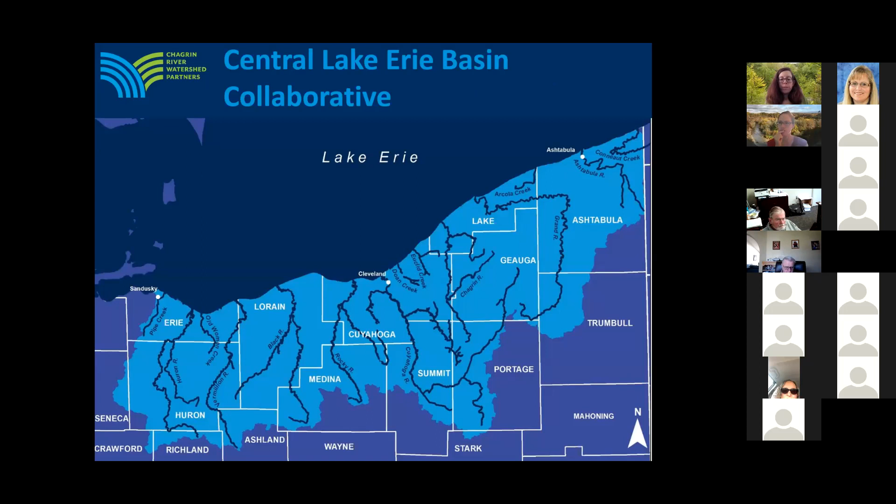CRWP really benefits from our trusted relationships with our member communities. Part of the reason we've been able to establish these trusted relationships include the following. The first point is that CRWP is structured with a community membership model. Each of the members in CRWP have a seat on our board of directors.

We've also been working with most of these communities for more than 20 years. For some communities we've been working with since our founding 25 years ago. We work closely with a variety of city, county, village and township departments, including mayors, councils, planning and zoning boards, the legal departments, the engineering staff. So we have a broad view of various perspectives in each of the communities that we work in.

Many of our communities consider us technical experts, and they involve us in development and conservation decisions. CRWP maintains a suite of model codes covering a variety of topics. If you're not familiar with the term model code, a model code is an example ordinance or zoning resolution that is a starting place for communities to use to enact their own regulations.

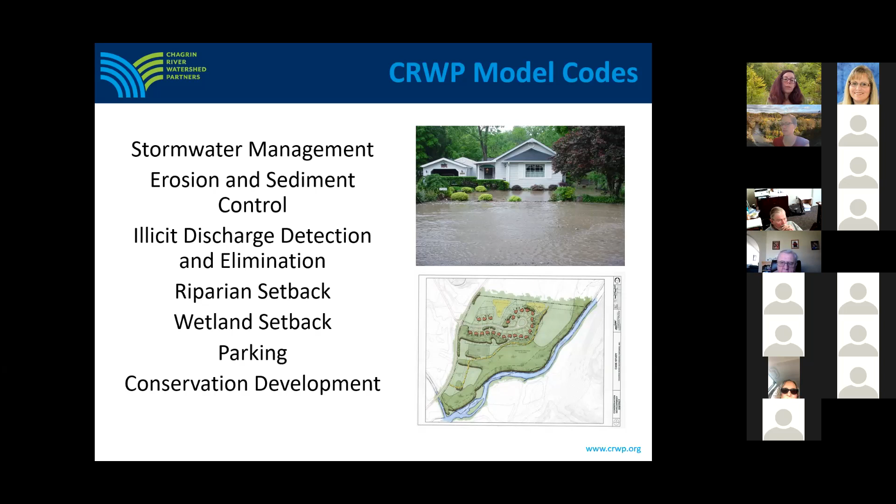I'll provide a little bit more detail about our conservation development code. If that's not a term that you're familiar with, it's a style of development that helps to preserve large portions of open space by using a different distribution of lots. So instead of having a little bit of open space on each lot, as would be the case in a traditional development, the lots in a conservation development are smaller, and then there is a larger area of pooled open space.

This style of development results in less infrastructure to maintain. It can be done through a planned unit development code or as a zoning overlay. And if you're interested in this, I suggest you check out our model code.

You may be wondering, why does CRWP have a parking code? What does that have to do with streams or stormwater management? Well, there's a direct relationship between the amount of parking that is required in your community and the amount of impervious surface in your community. So we developed a model parking code that includes language that communities can use to make sure that their existing regulations are allowing for pervious paving materials, shared parking, and land banking.

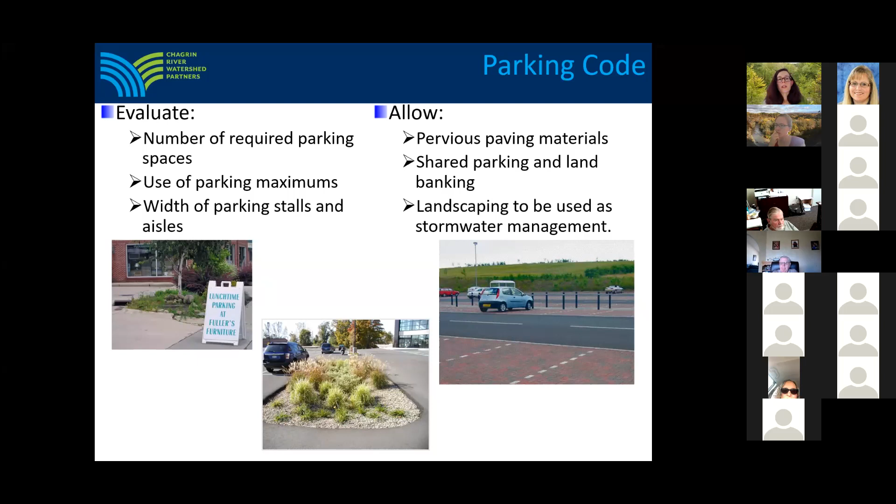We also suggest that communities look at the number of parking spaces that they are requiring to make sure that they are not requiring more parking spaces than are really needed, and to consider the use of parking maximums and consider reducing the width of parking stalls and aisles to reduce the amount of impervious cover in the community.

CRWP thinks that codes are great tools. You can use them to reduce the costs of private development to public infrastructure and to avoid problems upfront rather than fixing them later. Furthermore, if you're an MS4 community, you're required to have stormwater codes anyway, so you might as well make them do as much work as possible for your community.

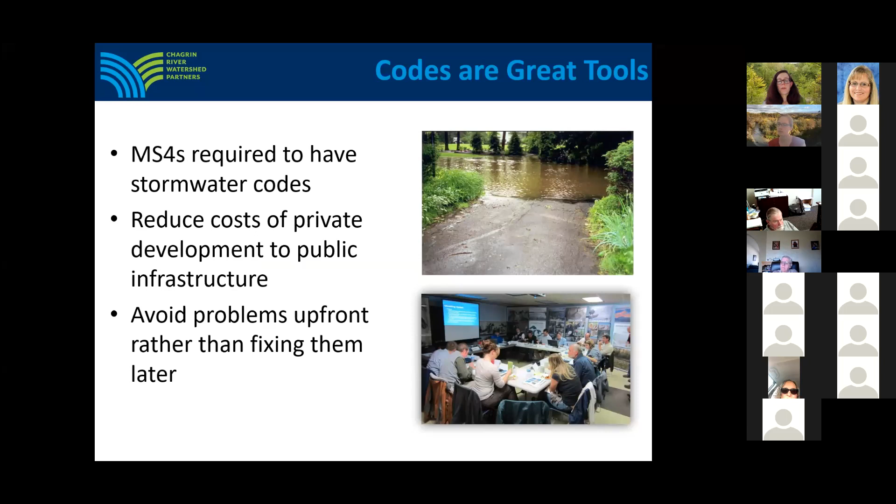Speaking of requiring to have stormwater codes, if you're an MS4 community, you should be aware that you need to update your comprehensive stormwater and erosion sediment control codes by April 1st of 2022. How would you know if you need to update your comprehensive stormwater and erosion sediment control code? Well, if you're using our model, you should update your codes. If you're not, here are some other things to consider.

In the latest construction general permit, the water quality volume changed. It increased from 0.75 to 0.9 inches, and there is now a new water quality volume calculation, which appears on your screen. If your old code has the old water quality volume and the old water quality volume calculation spelled out in it, you need to update your ordinance to be compliant with the new MS4 permit.

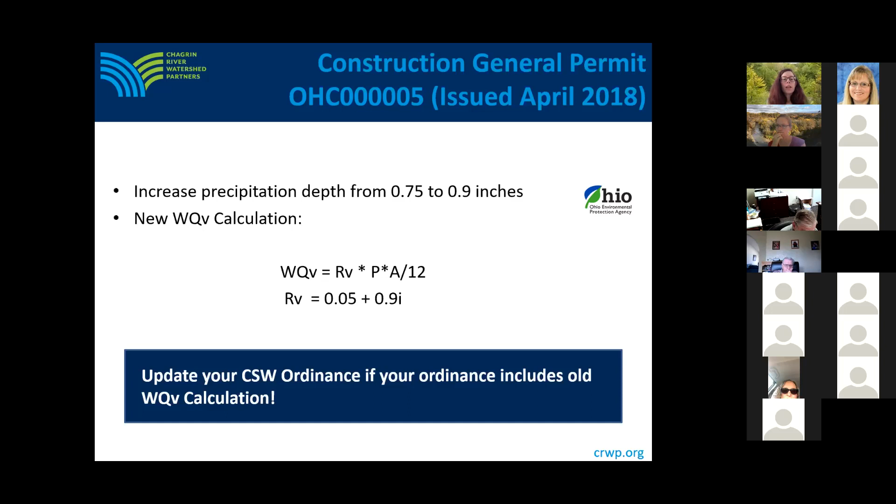Generally, if you spelled out everything in the construction general permit in your ordinance, you probably need to do updates to both of your codes to be compliant. If you didn't, here are some other things to think about. These are some general guidelines for what your erosion sediment control and stormwater codes need to have in them to be compliant with MS4 permits.

Your ordinance needs to allow you to require submission of a stormwater pollution prevention plan that meets the requirements in the construction general permit. You can go above that, but it at least needs to meet those requirements. It needs to give you the authority to inspect those sites. It needs to ensure that there is a mechanism that inspection and maintenance will continue for the stormwater control measures that are required to be designed and installed.

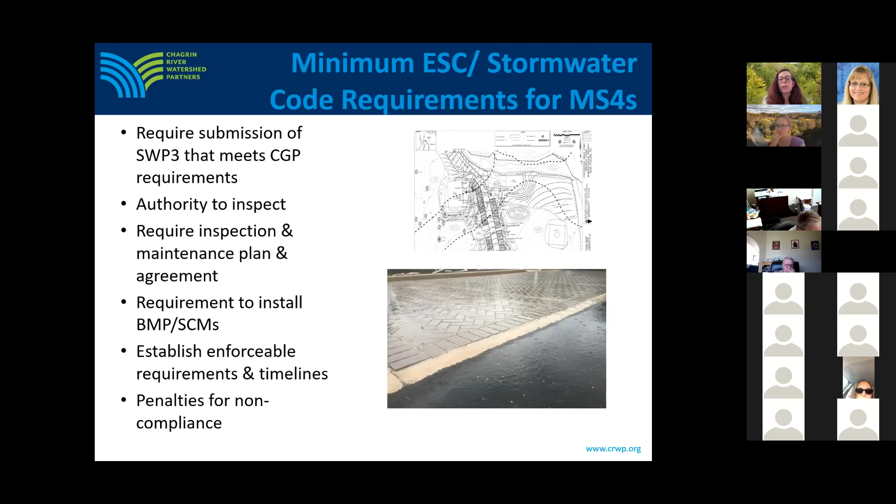You have to make sure that your ordinance says that not only do you have to come up with a plan, but those BMPs and SCMs actually need to be installed and functioning on the site. Your ordinance needs to have enforceable requirements and timelines, and you need to have penalties for non-compliance. If you don't think your ordinance has any of these things, then it's probably a good idea to revisit it and update it this cycle.

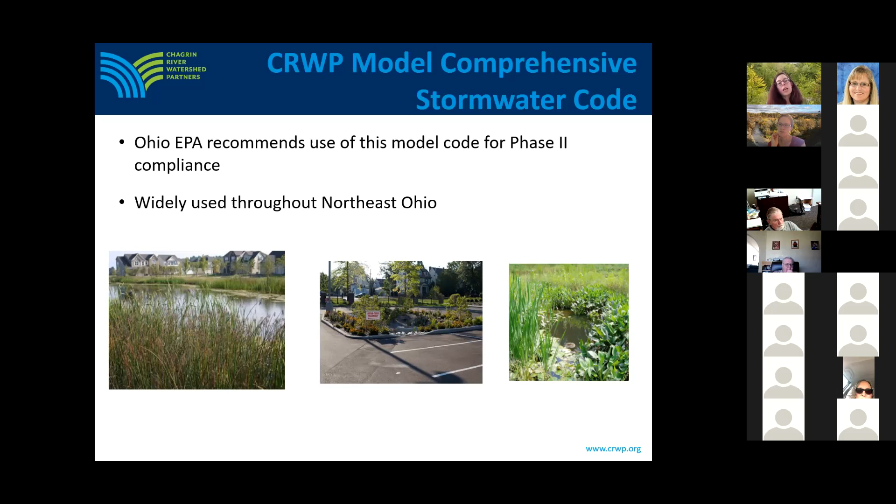So one tool that you can use to help you with that update is CRWP's Model Comprehensive Stormwater Code. Ohio EPA recommends the use of this model code for phase 2 compliance, and it's widely used throughout Northeast Ohio. This model was first issued in 2004 with updates each permit cycle since then. It's a collaborative effort of CRWP, Cuyahoga, Lake and Geauga Soil and Water Conservation Districts, and CRWP member communities, and has also benefited from insight and comments from ODNR and Ohio EPA.

The purpose and scope section is a brief overview of the overarching objectives of the legislation. The definition section in our model code now references all of the definitions in the construction general permit, and then we define additional key terms in the ordinance that are not defined in the construction general permit. We also define the construction general permit, since we're now using that term to reference Ohio EPA's construction general permit for our code. We include a disclaimer of liability, conflict and severability, and nuisances and responsibility section.

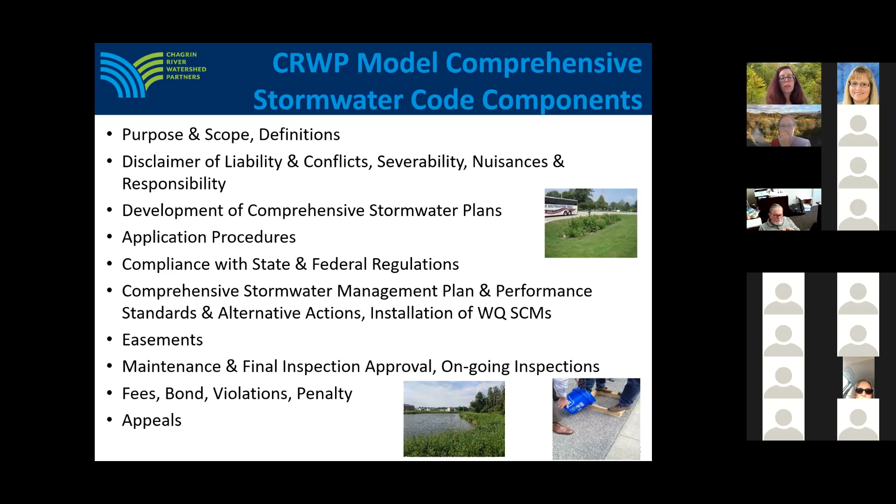The violation section states that no one should violate this ordinance. The penalty section states a fine and imprisonment penalty for violating this ordinance. And the appeals section states that property owners can appeal grievances about this ordinance to the Court of Common Pleas.

Our model ordinance addresses both water quantity and water quality. So a lot of what I discussed so far deals with water quality, but our ordinance also has language about conveyance. Our ordinance states that open channel conveyance is preferred whenever possible, and it does have some language about storm sewer sizing for sites for which open channel conveyance is not feasible.

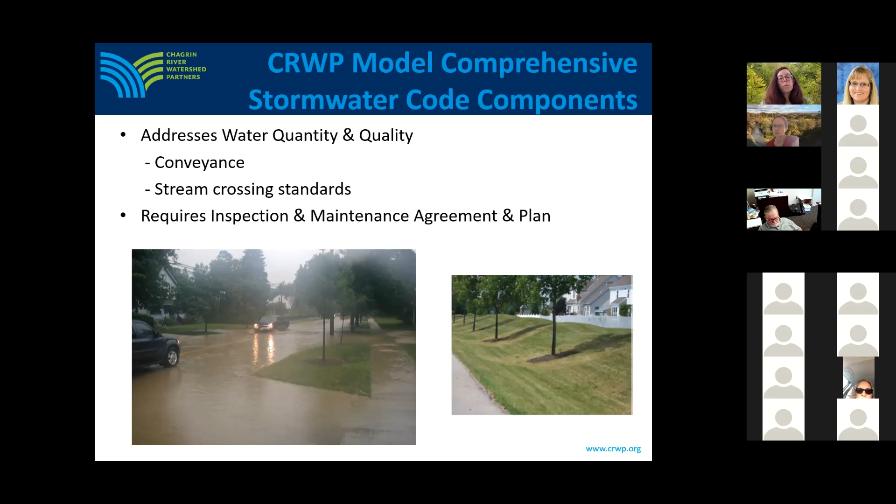We also have stream crossing standard language that includes things like bridges shall be the preferred crossing for high quality sensitive streams. Our code also requires an inspection, maintenance agreement, and plan. Our code uses the critical storm method for peak discharge management.

And for anyone not familiar, this is a method that was published in ODNR's Stormwater Manual in 1980 that states that the peak discharge post-development shall be no greater for the critical storm, and every more frequent storm should be no greater than the pre-development 1-year, 24-hour storm. And the critical storm is determined by how much the volume increases post-development relative to pre-development.

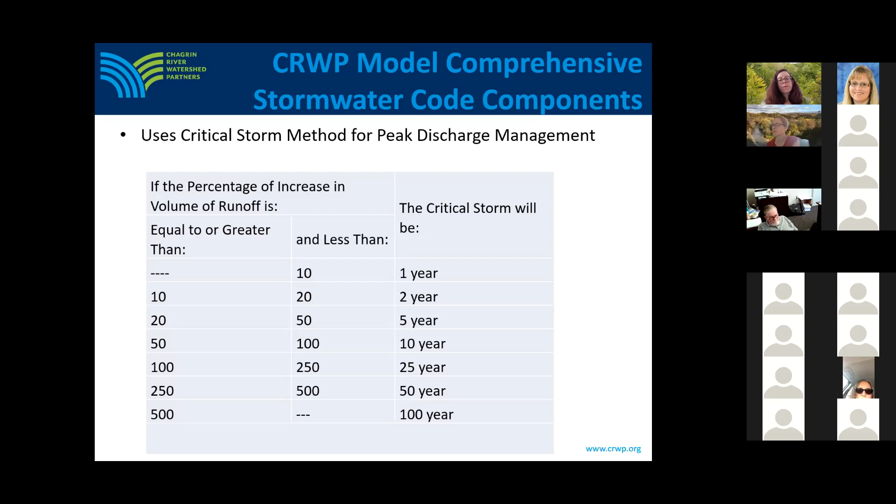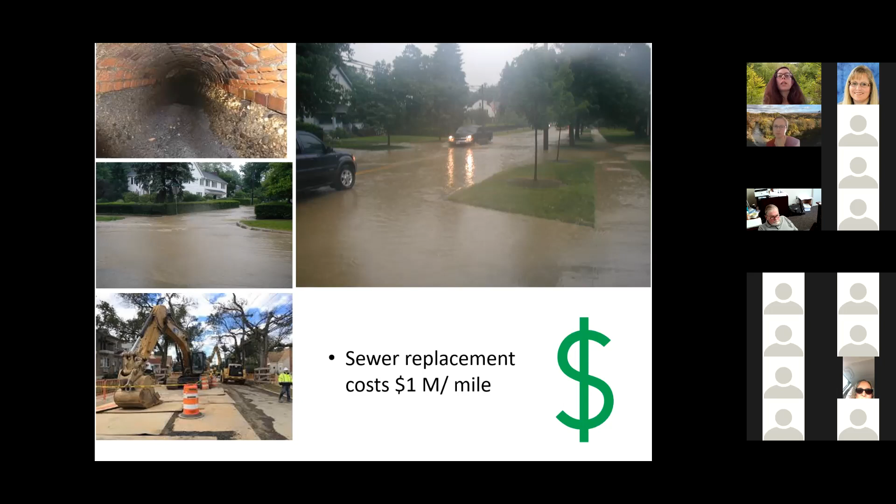And many communities feel like this is cost effective because other strategies such as storm sewer replacement can be very costly and very disruptive to communities. Furthermore, some communities, even if they're not currently having flooding problems, would like their storm systems to be as robust as possible because they've seen an increase in the amount and frequency of heavy storm events.

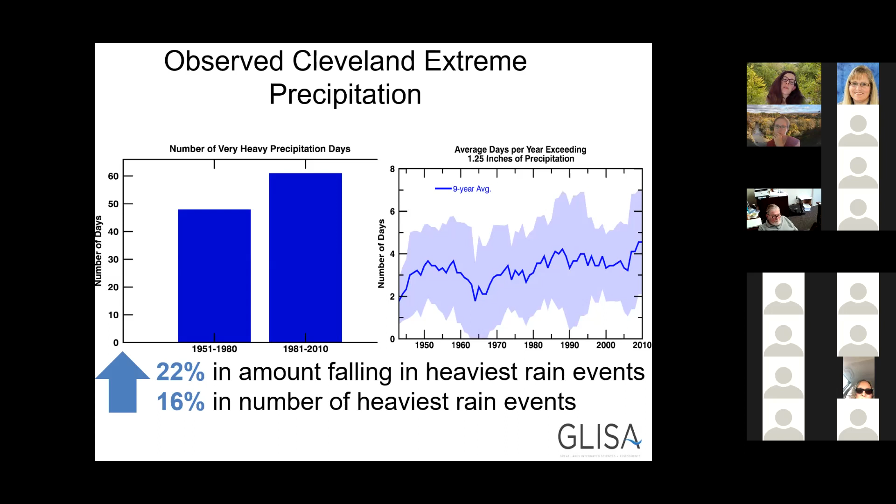This slide shows data from the Great Lakes Integrated Sciences and Assessment Center, or GLISA, that shows that the period of 1981 to 2010 relative to the period of 1951 to 1980 saw a 22% increase in the amount of rain falling in the heaviest rain events and a 16% increase in the number of the heaviest rain events.

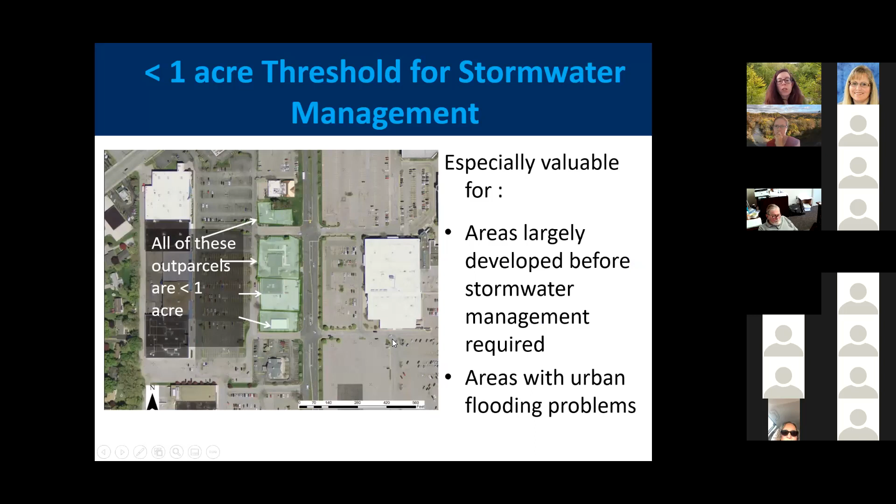If you're wondering, has anybody else required stormwater management at less than the 1 acre threshold? The answer is yes. Locally, the city of Willoughby Hills and the city of Aurora, Ohio, both require that all industrial and commercial development that requires a site plan complete a comprehensive stormwater management plan and install stormwater control measures.

Additionally, the city of Lakewood requires a comprehensive stormwater management plan for site disturbance greater than 8,000 square feet. And you can see that if you look nationally, there are many communities that have even lower thresholds at which stormwater control measures are required.

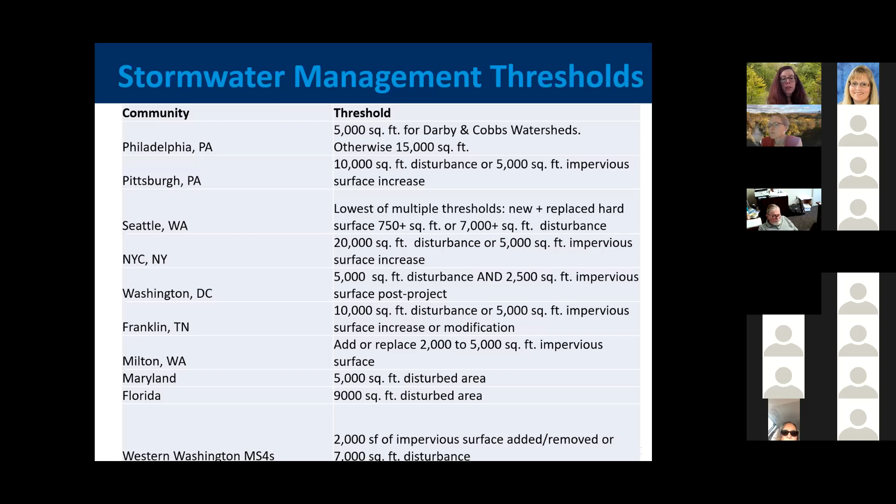We made this change primarily because the time frame that communities have to update their codes has shortened with this MS4 permit from 2 years to 1 year. And at the stage of the draft MS4 permit, Ohio EPA was considering giving communities only 6 months to update their codes. And we know it's very difficult for communities to complete ordinance updates on those timeframes. So we wanted to make our code such that it minimizes the amount of updates required in the future.

And another benefit of this change is that there will no longer be a lag between changes to the state regulations and local regulations. So for example, right now, in a lot of communities, the local regulations say that you must manage a water quality volume of 0.75 inches of rain, whereas the state regulations say 0.9, and this change will automatically make those types of changes consistent.

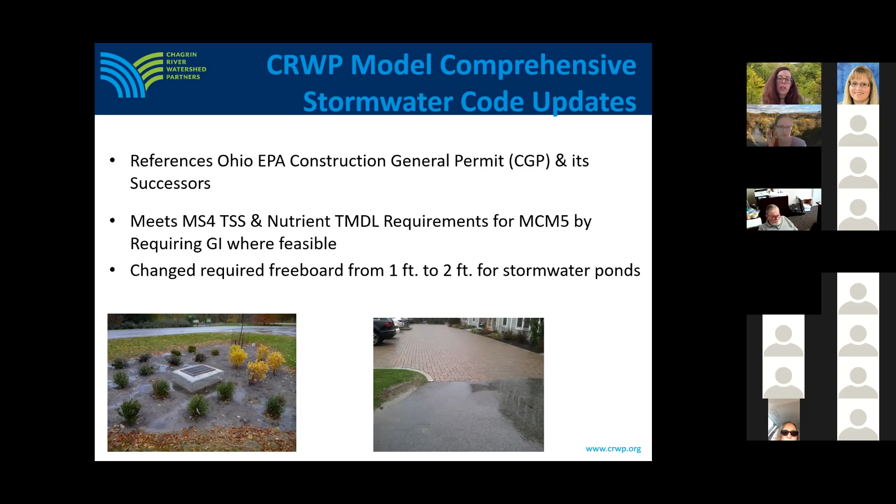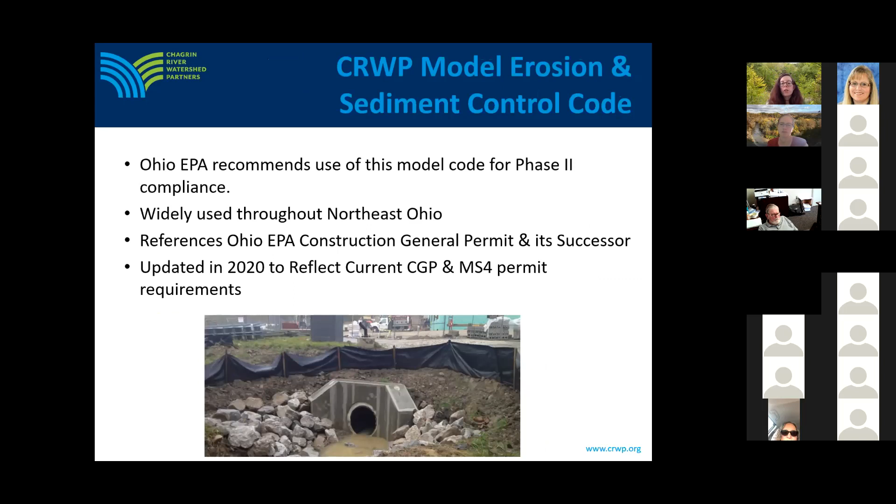Now moving on to our model erosion and sediment control code. Like the comprehensive stormwater code, Ohio EPA recommends the use of this code for phase 2 compliance. It is widely used throughout Northeast Ohio. It now also references the Ohio EPA construction general permit and its successors, and it was updated in 2020 to reflect the current construction general permit and MS4 permit requirements.

The first version of this code was issued in 2001. It's a collaborative effort of Chagrin River Watershed Partners, Lake Soil and Water Conservation District, and member communities. It's been reviewed by Ohio EPA for phase 2 compliance. And like our comprehensive stormwater code, this code has really benefited from suggestions and insight from all of our collaborators on the code.

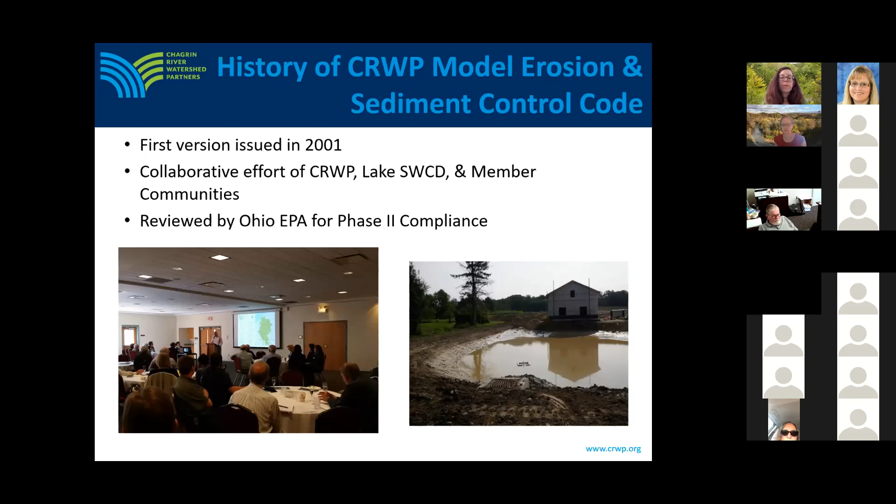Again, our model erosion sediment control code is very thorough. The section headers appear on this slide. The purpose and scope section states the overarching goals of the legislation. The definitions section references all of the definitions in the construction general permit. It defines the construction general permit, and it defines other key terms in the ordinance that are not defined in the construction general permit. We again have a disclaimer section.

We have a development of stormwater pollution prevention plans section that states when plans are required to be submitted. We have an applications procedures section that states that a pre-application meeting is required and the submittal requirements. We have a section on compliance with state and federal regulations that requires that the plan include evidence that the site has submitted its NOI for construction general permit coverage and has any needed 401, 404, isolated wetlands and ephemeral stream permits from Ohio and the Corps, as well as compliance with the dam safety regulations if applicable.

The stormwater pollution prevention plan section states that the SWPPP at least needs to meet the requirements outlined in the construction general permit. And we also state that the plan needs to include a filled out sediment

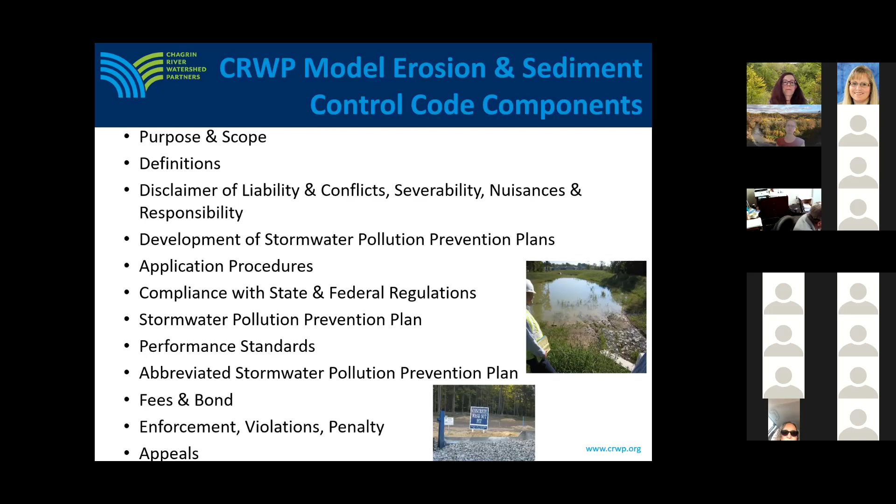The main changes that we made to our model erosion sediment control code from 2020 compared to 2016 are on this slide. Like the comprehensive stormwater code, we are now referencing the Ohio EPA construction general permit and its successors in our model erosion sediment control code. And these are for the same reasons. We wanted to make it easier for communities to have to do updates less frequently, and we wanted consistency between local and state regulations. Our code now also includes mechanized clearing as a trigger for a SWPPP, and we removed

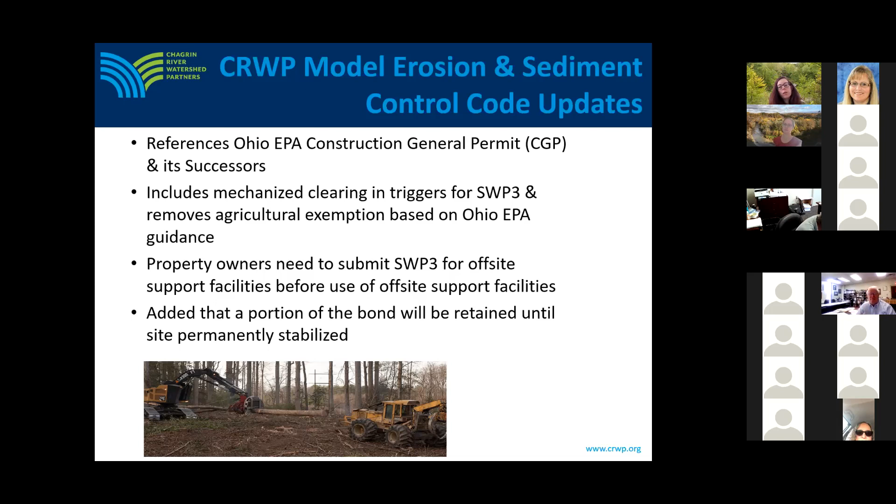the agricultural exemption. We did this because we learned that some soil and water conservation districts were treating mechanized clearing as a silvicultural harvest under the agricultural rules, whereas Ohio EPA considers mechanized clearing to be the first step in the development process. So we changed our code to align with Ohio EPA's guidance. We also added that property owners need to submit a SWPPP for offsite support facilities, such as spoil locations or asphalt plants, before they start using such offsite support facilities. And we added that a portion of the bond will be retained until the site is permanently stabilized.

We also added a section in our code that relates to the requirement in the MS4 permit that MS4s need to conduct inspections every 14 days instead of monthly if sites have certain deficiencies. And those deficiencies are construction activities have started at the site with no SWPPP completed, or the property owner has failed to install the sediment basin when the SWPPP clearly indicates that that should be the first step, or they have failed to implement any sediment or erosion controls, or dewatering activities are resulting in turbid discharges.

And because MS4s now have to inspect those sites more frequently, we added language in our code that allows MS4s to pass those costs on to the property owner by having them pay a $250 additional fee for each additional inspection that needs to be conducted because of those issues on the site.

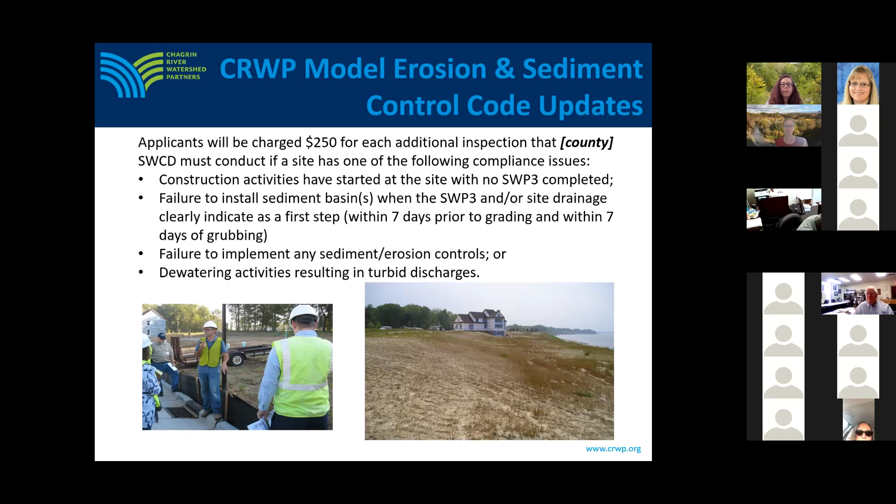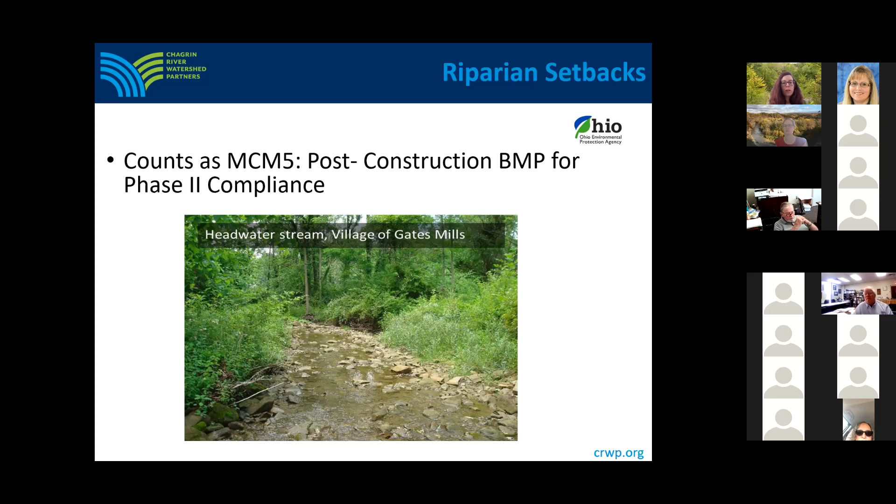The last code I'm going to be covering in detail today is our riparian setback model code. As a reminder, riparian setbacks count as a post-construction BMP under MCM 5 for Phase 2 compliance for MS4s. I'm going to begin by reminding all of you of some of the services that healthy riparian areas provide. Healthy riparian areas have root systems for trees and bushes that help to hold stream bank soils in place, limiting stream bank erosion. They also help to reduce downstream flood impacts by slowing water velocity and enabling water to soak into the ground on the floodplains.

They filter and trap sediment, nutrients, chemicals, salts, septic discharge, and other pollutants, and they protect surface and groundwater quality by acting as filters. They influence temperature by providing shade, which can be particularly important for cold water streams, but important for all streams. They help to reduce aquatic nuisance species, and they help to enhance wildlife habitat and biodiversity.

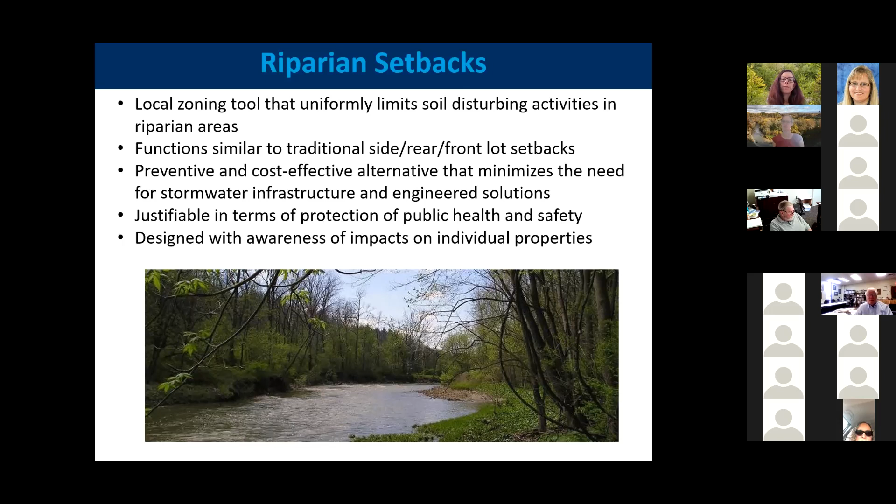I'm sure many of you are aware of situations where houses have been built too close to streams and structure flooding and potentially loss of life have resulted, or structures have been endangered because of stream bank erosion. But adopting riparian setbacks allows communities to maintain the free services that riparian areas can provide as land is being developed. So communities with riparian setbacks continue to get benefits for flood and erosion control and water quality improvement, even as development occurs.

Sometimes communities worry that implementing riparian setbacks will lower property values in their communities, but the research shows that that is not true. In fact, some studies show that implementing riparian setbacks actually increases property values in a community.

Our model setbacks are based on the drainage area of each stream. So our model states that a stream that drains less than a half square mile and has a defined bed and bank has a 25-foot setback measured from the edge of the stream outward in both directions. Streams that drain between a half mile and 20 square miles have a 75-foot setback, and streams that drain between 20 and 300 square miles have a 120-foot setback. And our model extends that setback to the outer edge of any wetlands that intersect the riparian setback and the outer edge of a 100-year FEMA floodplain.

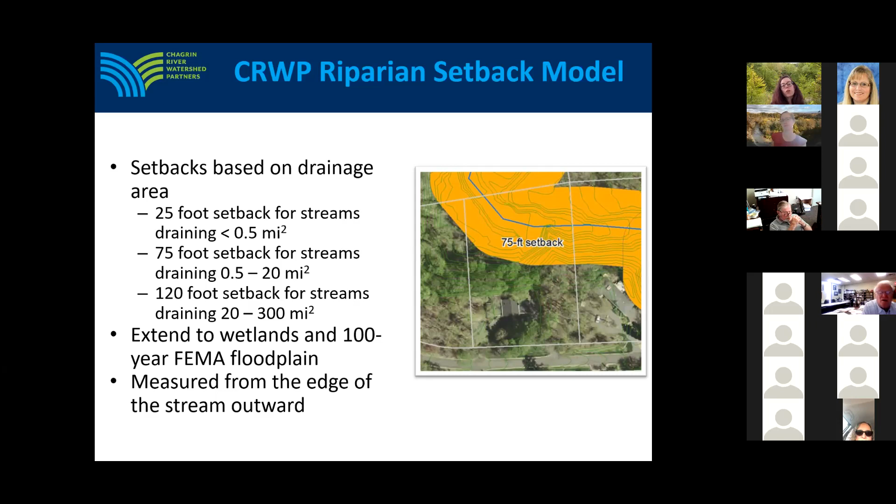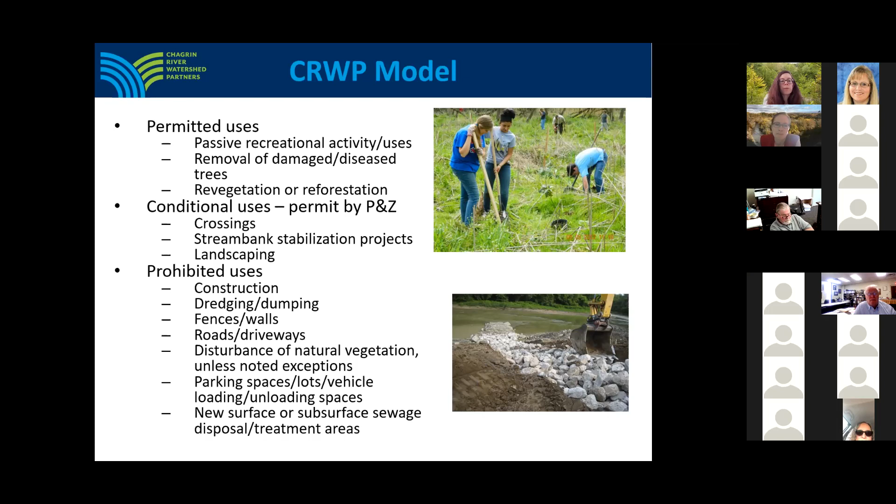Our model does not apply to existing structures that were in existence prior to the riparian setback being in place. Sometimes people worry that it's going to require houses that are already too close to streams to be torn down, but that's not the case. Those existing uses are grandfathered.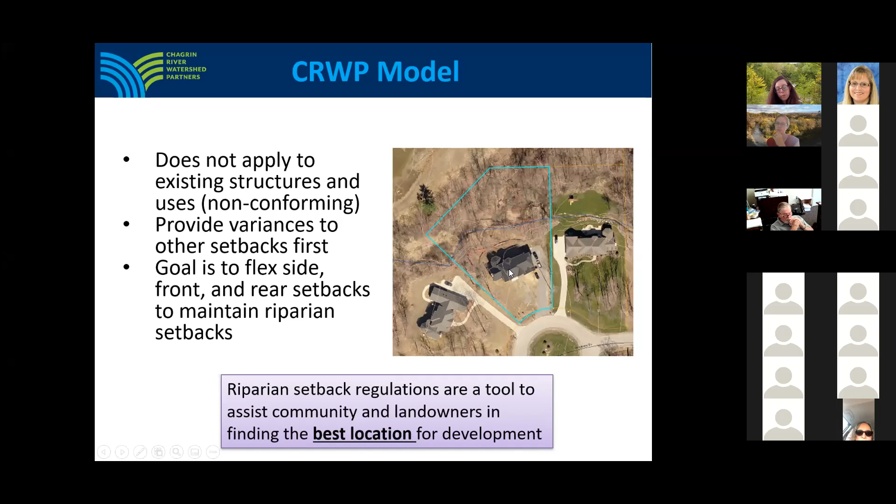We do recommend that communities provide variances to other setbacks first, so that they would first flex side, front, and rear setbacks to maintain the riparian setbacks. So this picture is an example of a community that did just that. They had riparian setbacks and they flexed their front setback, allowed their house to be built a little closer to the road than it otherwise would be to maintain the riparian setback and to prevent future damage to that structure from flooding and erosion.

If a property owner tore down their home and wanted to build a new one, they would need a variance to put that structure back where it was if it was within the riparian setback, and they would need to show that there was no other logical location where the new home could be built on the parcel in order to get that variance.

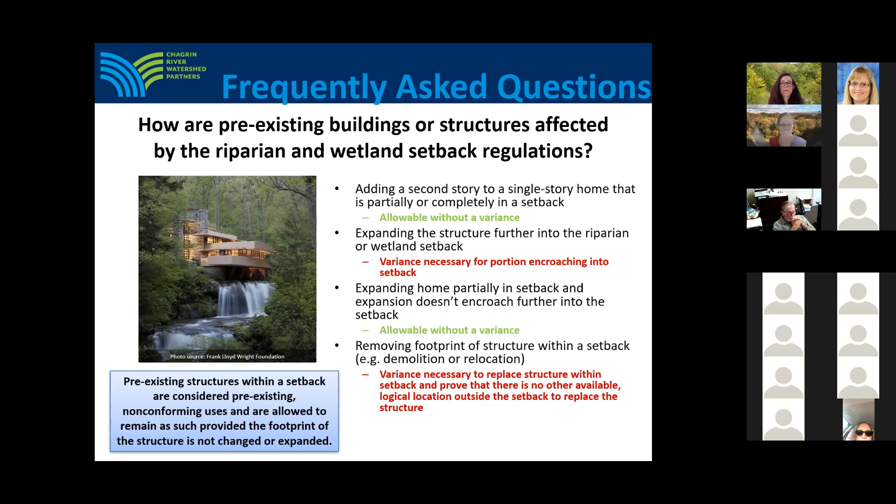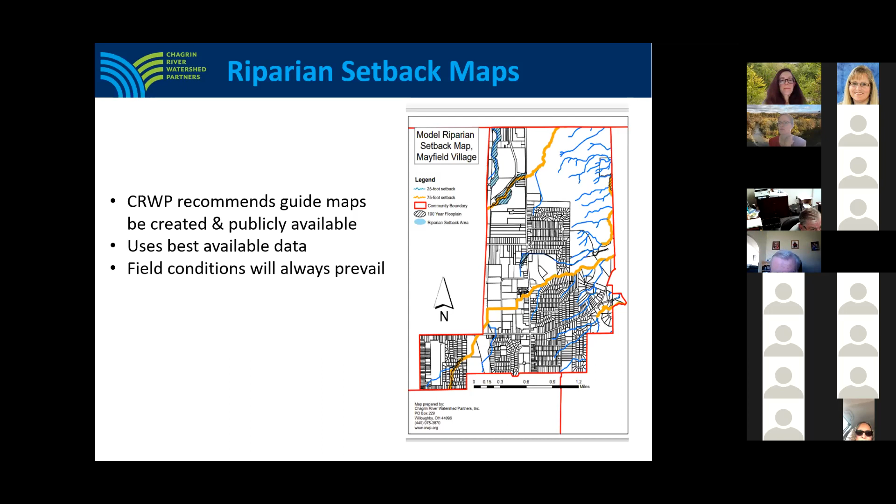Keely, there looks like there's one question in the chat, and it reads: is the amount of $250 listed somewhere in the new permit for penalty, or of the new MS4 guidelines? No, the MS4 permit does not require you to charge a fee for doing the additional inspections. It just requires you to inspect more frequently. We just added language to our model that allows you to recoup those costs. If you don't like that, you could take that out when you adopt your ordinance.

Are there any other questions? Yes, I have one question. In a riparian setback, if there's a bunch of down trees, sediment that has built up and kind of dammed off the flow of natural water through the riparian setback, is it permissible to go in and just have those trees and debris removed out of it, or do you have to go through the Army Corps and permitting process for that type of work?